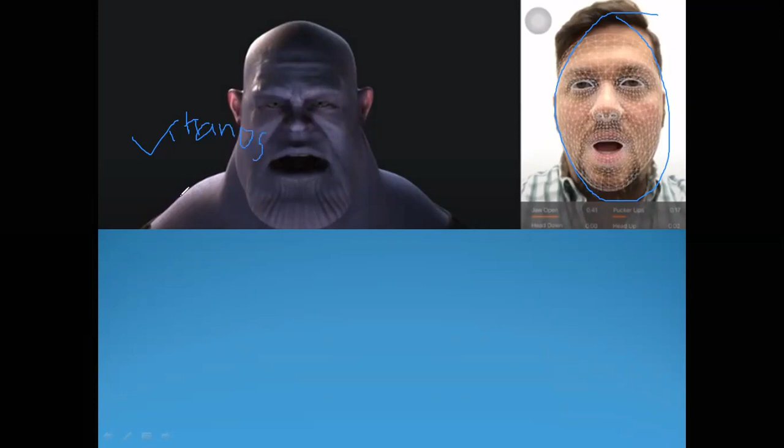I hope most of you have seen the movie Avengers, starting from, I think, the last two parts, where Thanos was there. In this image, you can observe the person has some mesh on his face, and on the left side there is a canvas. As this person moves, the movement of this person controls the movement of the canvas. You can see on his face some right-angled triangles are made.

I will denote it with the help of this. One right-angled triangle is here, another right-angled triangle is there. That is, squares are divided into two parts and that becomes a right-angled triangle. So that is nothing but, in our simple language, called animation.

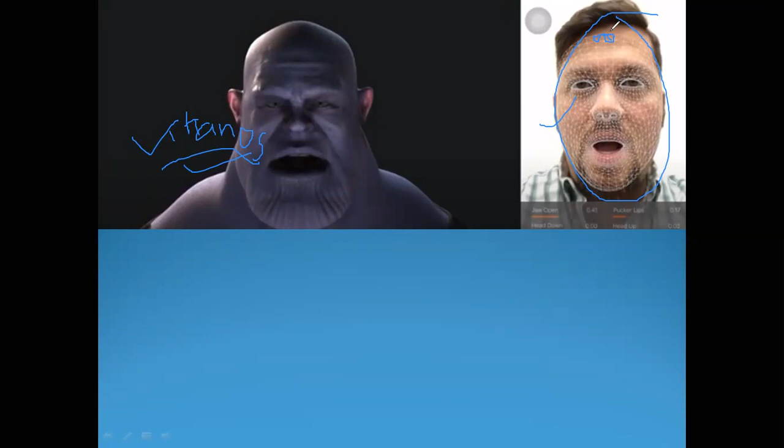Now the second example I am going to tell you. I will clear all the drawings. Now, the second example. So this is a face.

Some of you might be drawing sketches by using some grid. If you want, you can go for videos, YouTube videos like that. There are some faces which we have to make a grid and follow. Suppose I will tell with the help of the annotation, that is, suppose if this grid is there, this particular grid contains the left side of the eye, some white portion, some black portion, and some brownish portion.

If I consider the color image, so that image is there. Then the hair side contains some white portion due to light effect, and some portion is black, which is shaded and mixed with light, so some portion becomes gray. According to the color combination, we have to choose the proper shade while drawing any kind of sketch.

But before that, we have to divide this whole sketch into a number of small elements. This element is a square, and we are dividing the given space into a number of small elements, and that division is nothing but, in our term, we can call it an FE. This is done with the help of drawing, but we have to take positive things from that.

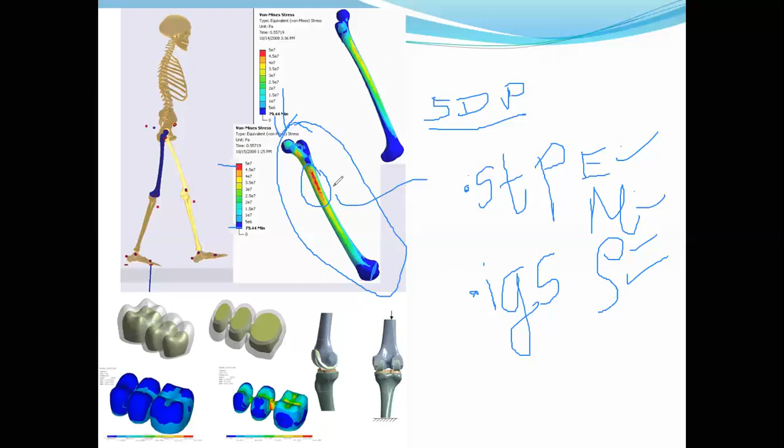So for that purpose, we need to first check it with FEA, then go for manufacturing, and then we can go for implementing it. Now I will just clear these things.

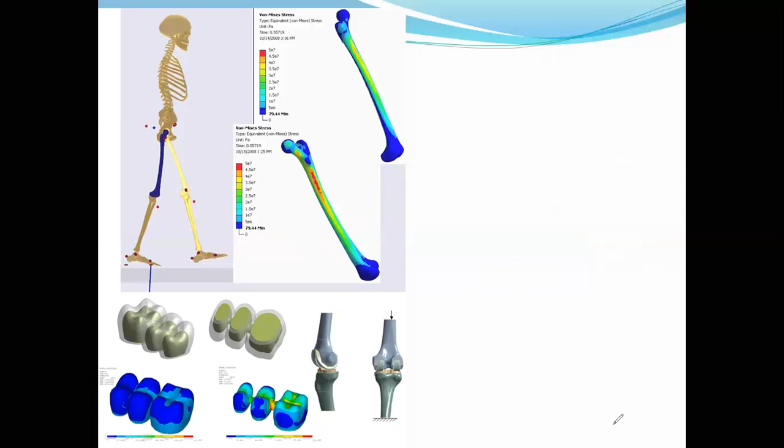Now the dental analysis is also shown. I will talk about it later since some images are coming up. But dental analysis is also the same thing. We need to define the force, we need to define some fixed support. We can define it, and we are going to see this in detail. So I'll clear these things first, then move to the next part.

That is the human brain. See here, some elements are there, some yellow colored and some blue colored elements. But all are triangular, you can observe here. All elements are triangular in nature. Every element, I will show here, all elements are triangular like this.

This is the structure of elements which are interconnected to each other, and all elements are triangular, you can see. So these elements are connected to each other, but they look triangular. But our brain is not a 2D image, a 2D thing. Brain is a 3D thing, so for the third dimension we have to consider the Z direction also. Suppose this is our X direction and this is our Y direction, then Z direction should be there. So for that purpose, the element used is tetra element.

Element used for this kind of brain is tetra element, because we can't use a simple triangular element which works only for surface things. But if we have to go for a solid, then we have to go for tetra. I will tell you later in the next lecture how to choose the element. For example, I have shown this, the use of FEA in the medical field. So I will clear this.

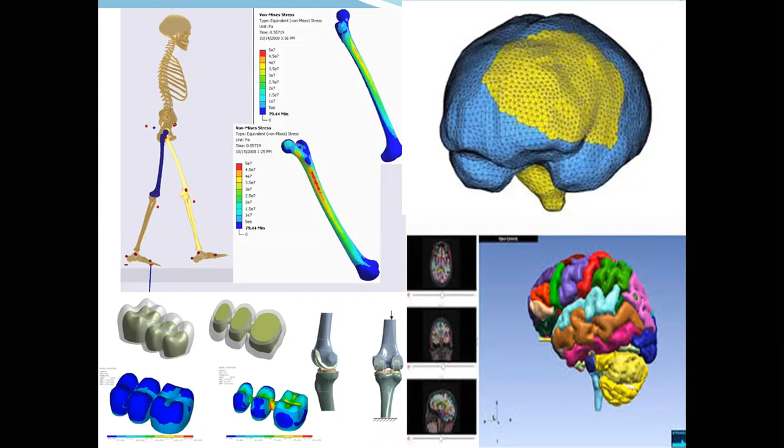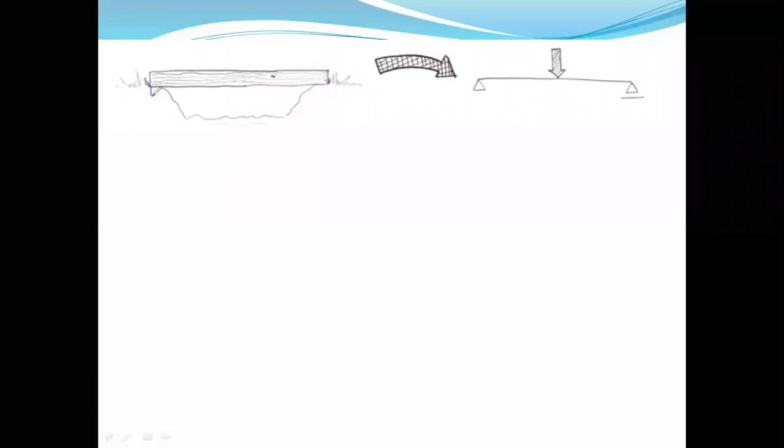See, one bridge is there and it is simply supported. For that purpose, we have to consider this part, and particularly this part, for the loading constraint. As of now, I will tell you this is the simply supported view. As per this, we can convert this into this.

Converting the given structure into a number of elements, see here, the element considered is only in one direction, the x direction. Previously you might have observed the element for the face, drawing the face. I told you that was a 2D drawing, but in the second slide I told you the element for the brain is 3D.

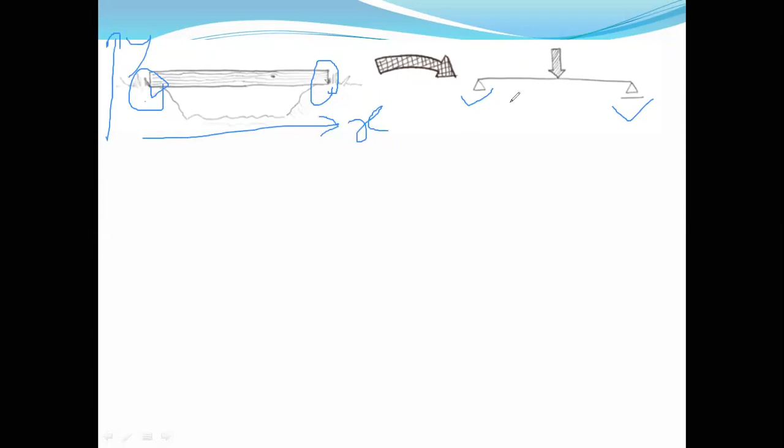But this is not. Are you observing the y direction anywhere for this beam? Only consider this beam, not suppose. No, this is only 1D. So we have converted the given object, that is this bridge, into the 1D element.

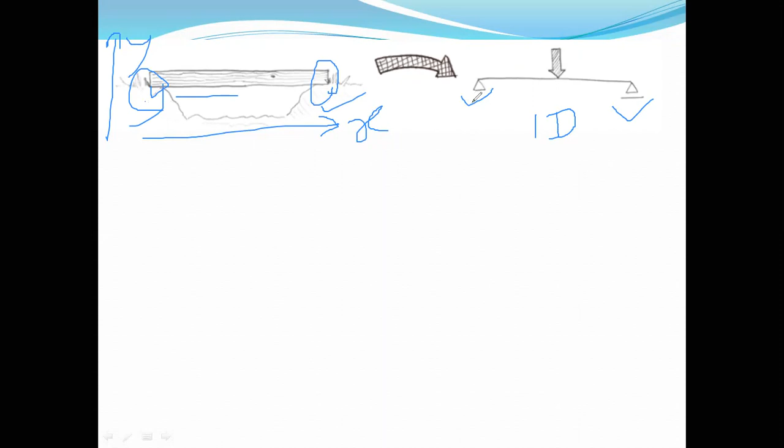And we have converted these two supports to simply supported, so we can call this a simply supported beam. And if a person is moving on that bridge, then we can consider it as a point load which can be applied at the center or anywhere. That's how we can convert our given object into the finite element. This is nothing but, yes, a finite element model.

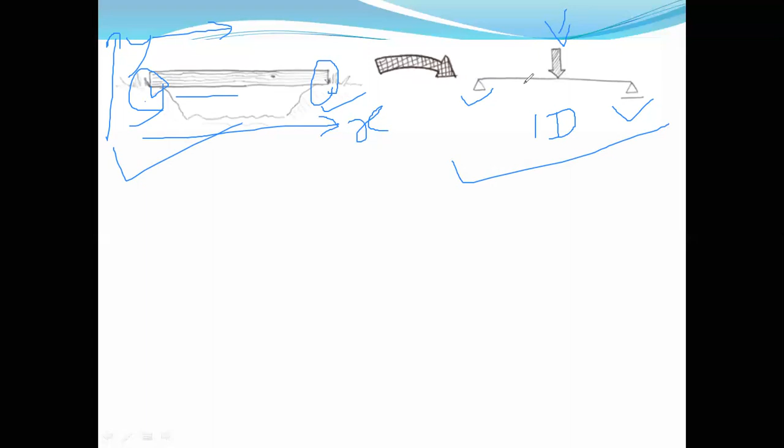So we can divide this 1D beam into a number of small parts also. That will be element number 1, element number 2, element number 3, element number 4, 5, 6, and so on. But the element endpoints are called nodes, as I have discussed in the last lecture.

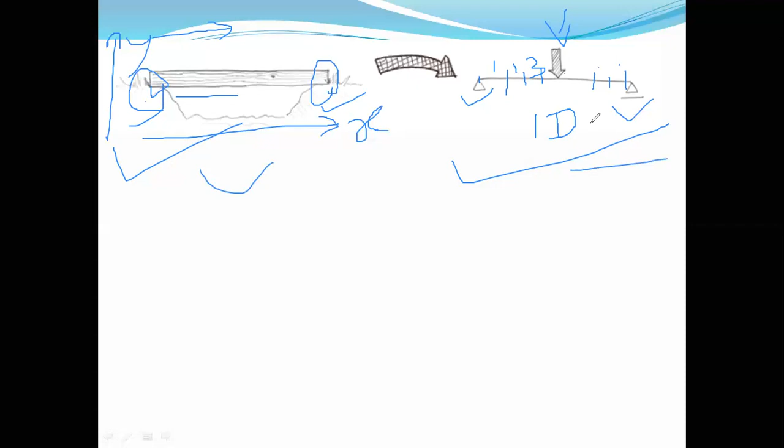According to our structural method, where we are joining the parts, that is beams, they are having some kind of failure, because they are weaker than the complete material. If a rod is there, then the rod cannot fail in between. But if a rod is connected to another rod, then the joint may fail.

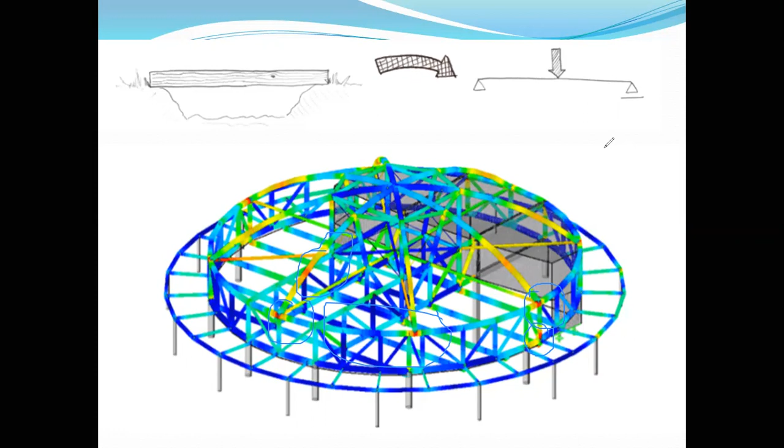So next slide, in this another structure is shown. The structure is having the first structure, so this is the red patch. You can observe here, this is the red patch.

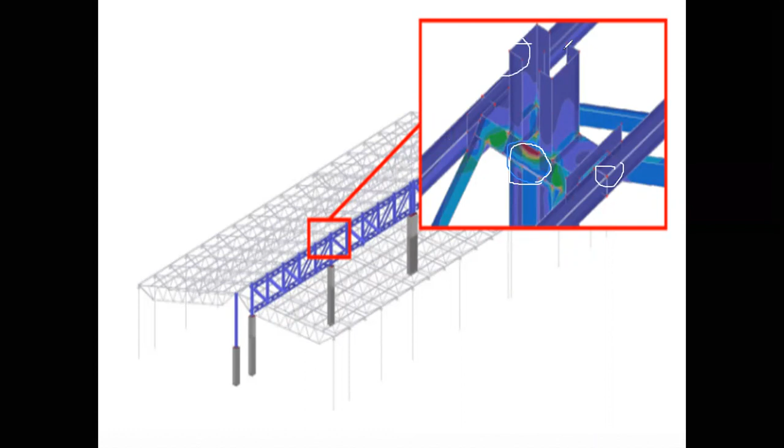These are some small points called nodes, and these are some elements you can consider. But this is a very complicated structure, you can observe this. So for that purpose we need a number of hours to see, and we can model it and analyze it after application of FEA. So it takes some time and experience also. Remember, we can analyze the things which we have to manufacture.

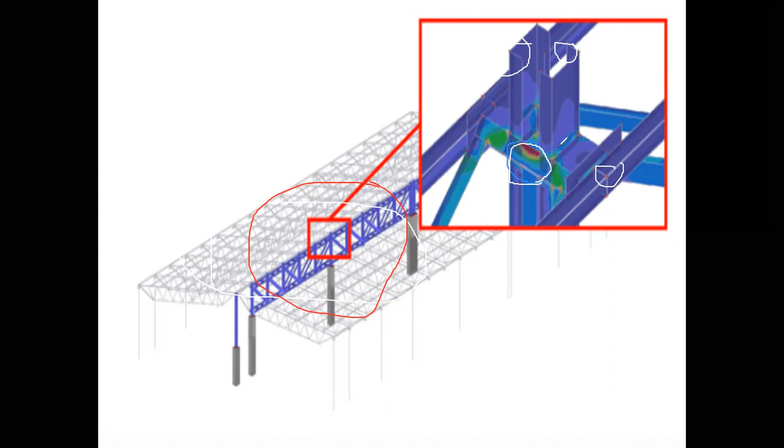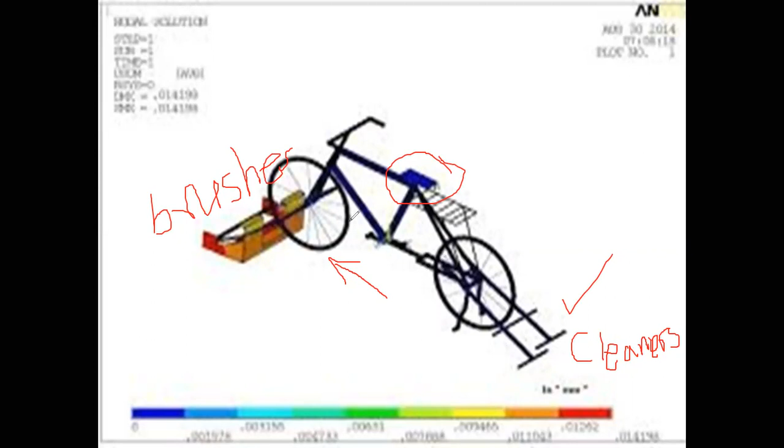But this model should also be analyzed, because in analysis we should get how much pressure or force is going to apply for these brushes or these things, how much force this bicycle here and here can bear, meaning force in terms of load. Load of these attachments should be borne by the cycle. Then the normal user can handle the pedal and it should be user friendly. So for that purpose we have to analyze all the things in a very specified manner, and different analyses are available. You can check on the net by putting a name like bicycle pedal cleaning setup, and you can get different ideas for that.

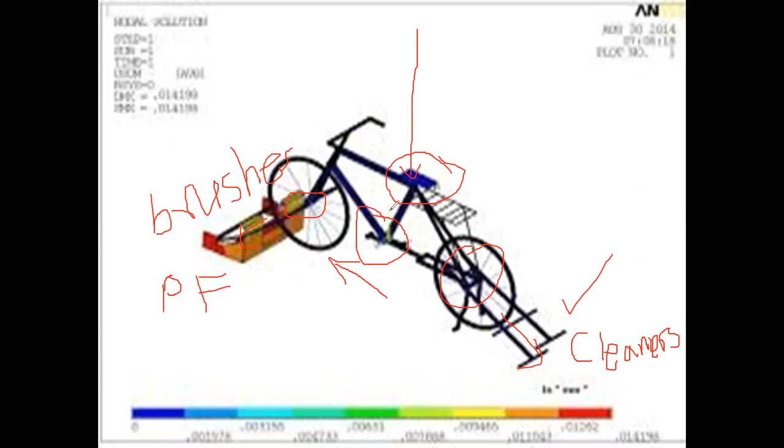Now next one, see, this is the static structural analysis. This is the Baja model, that is SAE Baja model, which I have downloaded. Here we have made a 1D structure. This is the rod we have considered, this is also the rod we have considered, but we have applied the cross-sectional area which is uniform in nature.

But here we can see the portion is actually the red portion, which is having maximum stress or maximum deformation. So we have to think about deformation also.

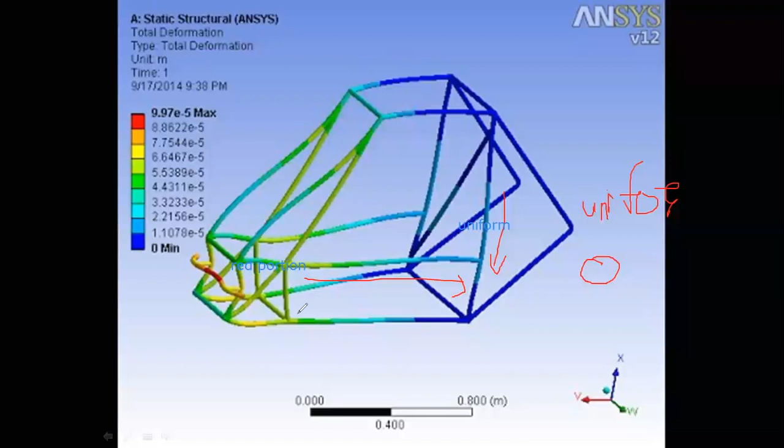So I will tell you here. Then this blue color you can observe here, here, here, not here, here, here. That blue color is having deformation of 1.107 into 10 raised to minus 5.

Then next one, the sand color, here we can observe the color nearby that exact blue color. Then it is moving towards green shades, which we can observe here, green and yellow shades. Then orange shades, which will be nearer to red shades. This orange shade means the deformation lies between 7.754 into 10 to minus 5, to 8.8622 into 10 to minus 5. Then above 8.86 to 9.97, which is maximum, lies here. So that is the satisfactory analysis we are going to observe in this semester.

Then there is another concept here, that is x-axis, y-axis, and z-axis, which we have to consider. There is a local and global coordinate system which we have to learn during the theory sessions, and you will have a lot of knowledge of theory, and after that you can apply the theory into practical. So we are going to see it stepwise, but just for conceptual purposes you can see this figure, that is the contour, and you can observe the stress.

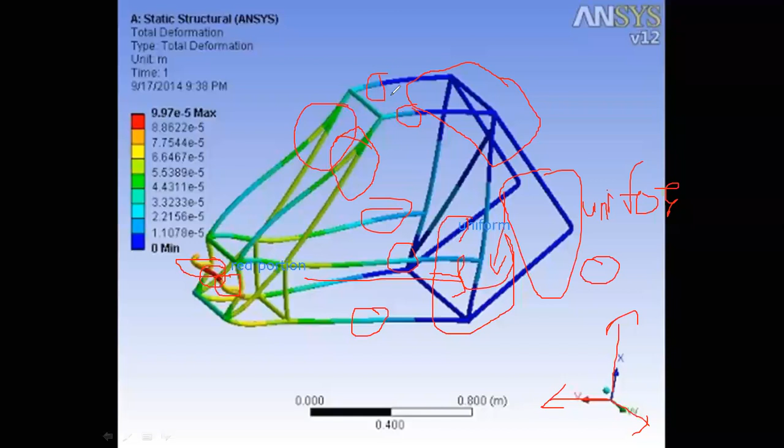See, this lecture, this webinar, is taken because I wanted to tell you what FEA can do. So after that we can start the actual syllabus. Okay, now next one.

This is the actual car. As I told in the previous slide, there is only structural analysis here. The fixed constraints are given and force is applied, then we look at what is the actual behavior.

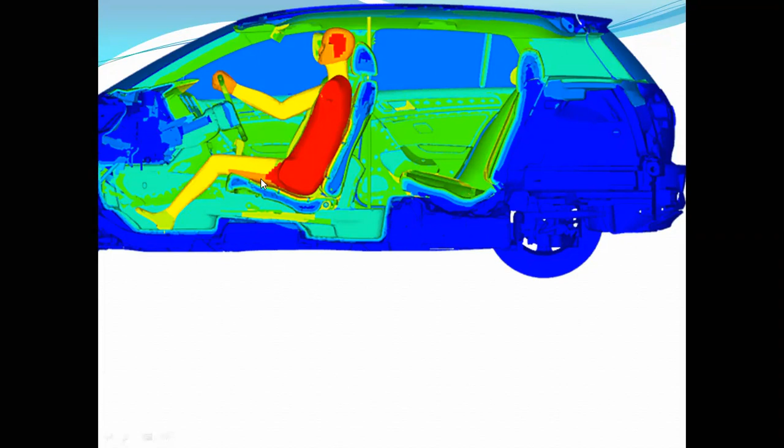But when we go for any kind of thermal analysis, we have to consider the atmospheric and weather condition. Human body temperature is 37 degrees Celsius as we consider, so that is shown in the red portion here.

You can observe this portion has the maximum temperature, but we know some temperature should be followed by the body. Our hands have less temperature than the actual body, and other parts of the body have even less temperature.

But the actual inner part is not shown, where the temperature will be higher than our human body, so that part is not shown. It is only a cut section of the car where the user is sitting, and this car model is made only to check whether the person can sustain the car temperature or not.

So the thermal conditions were given as an input, and the output comes as a temperature distribution. This is the temperature distribution diagram. In the next figure, you can observe this.

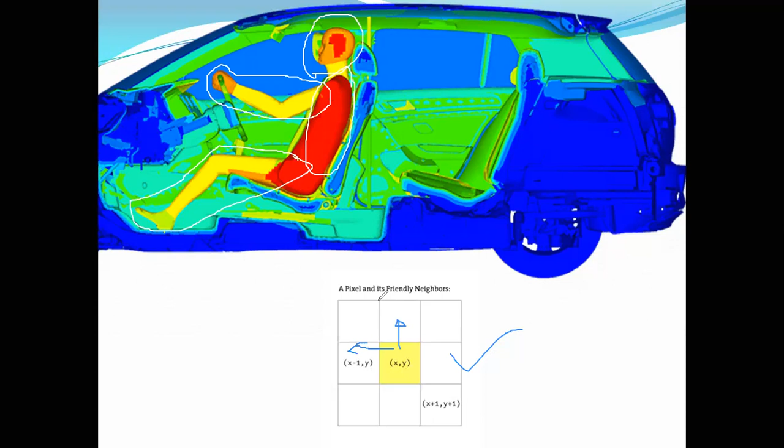This figure has x and y. If x and y is counted as 0, then going horizontally backward it will be x minus 1, y. Going the other way, it will be x. Here x and y, but accordingly x and y will be there, with x in the same direction, so it will be y minus 1.

Now for this part, here it is x plus 1 and y, and here x and y plus 1, and here x plus 1 and y plus 1. Likewise, we can go for pixel measuring in FEA. That is the concept of pixel in FEA.

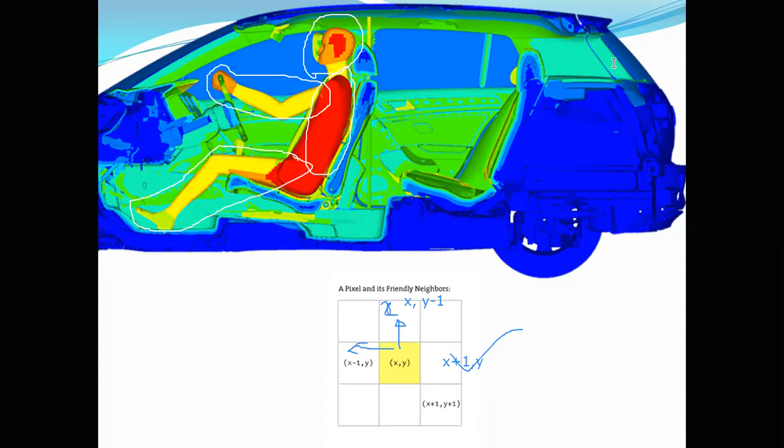Now we move to the next slide. This is also a temperature drawing. See here, a pixel structure is there, you can observe it. This is also called a pixel.

Such a pixel will have an element size. You can observe this element size is different here, and the shape is also different, so this element size and this element size are not the same. That creates some kind of error in the machine. So we can mesh in such a way that we divide the given structure so that this element size and that one are quite similar.

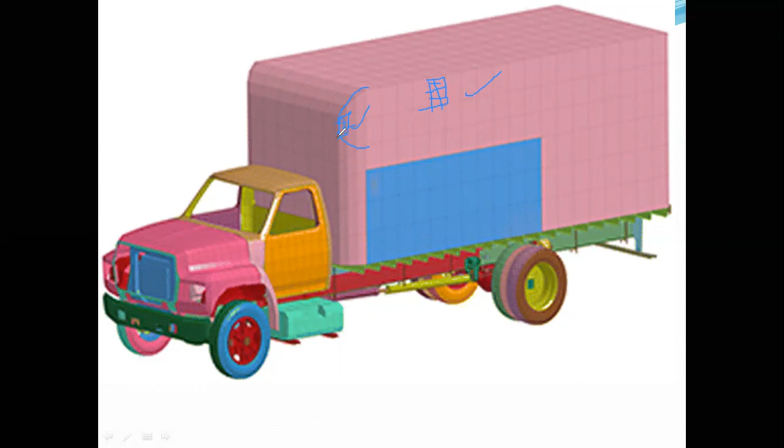We have to divide this structure again into small elements and mesh it again and again, doing a fine mesh, so the element size should be very small and closer to these values. At the end we will get good quality mesh and more accurate results than this model has.

Next slide, we'll go for it. Now this is the scissor, hydraulic scissor structure. Actually this was the model supposed to be manufactured by me. This was my dream project, and with electricity I was making it.

But this was my first trial and error, that is, if we can move it up to the fifth floor by telescopic arrangement, but that is not possible because it requires a lot of space. Still, it is analyzed by using the FEA software.

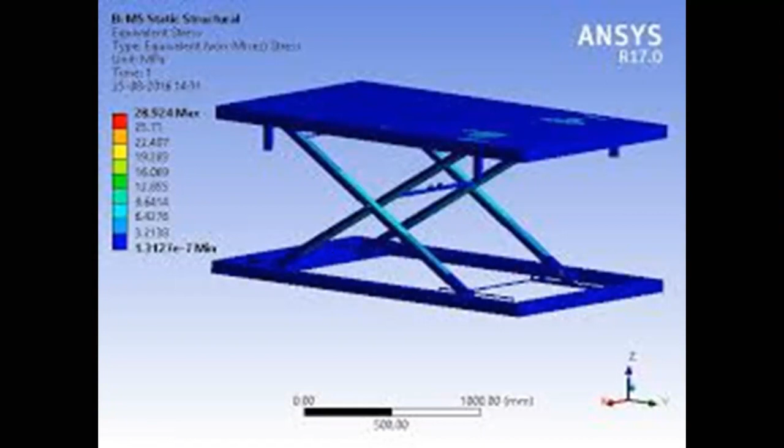This model has blue everywhere. Blue means the model is more than safe according to our material application and according to our boundary condition application. On the next slide, we are going to move on.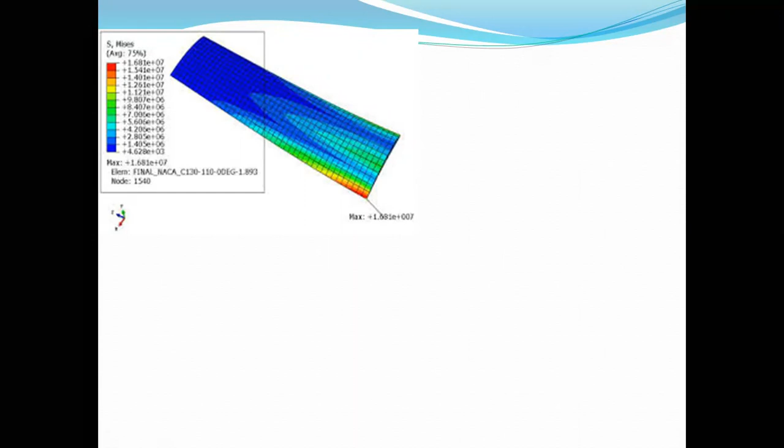Now we are moving towards real life approaches, some daily life examples. We have a fan in our room, so this is the blade of a fan. Here we can observe in both figures, the blade fails.

Here the blade fails means when the concept comes to join, the failure will happen. So we have to take care that our joint should be strong and the material used for joining should be good quality, and we should go for some better modifications also. If there will be fans which are not having any kind of joint, that is the whole structure is an assembled structure, then that will be the best quality fan. The blades will not move here and there, and blades will be completely stuck to the original model, main part of the assembly. So we can model it, but that is not feasible, and we are not facing that because there are some other conditions.

So we are facing the fan having some blades. So this is another structure. This is not actually a fan, but for concept reasons I have used this image. I didn't get the image which is under analysis.

Then there is another analysis which we can do, that is analysis of a room. If a fan is in the room and that room has an area of 1 kilometer by 1 kilometer, is it possible for every person sitting in that room to get air from the fan? No. So we have to analyze how many fans are needed in that 1 kilometer room, and we have to analyze in a simple way, that is the flow analysis of air.

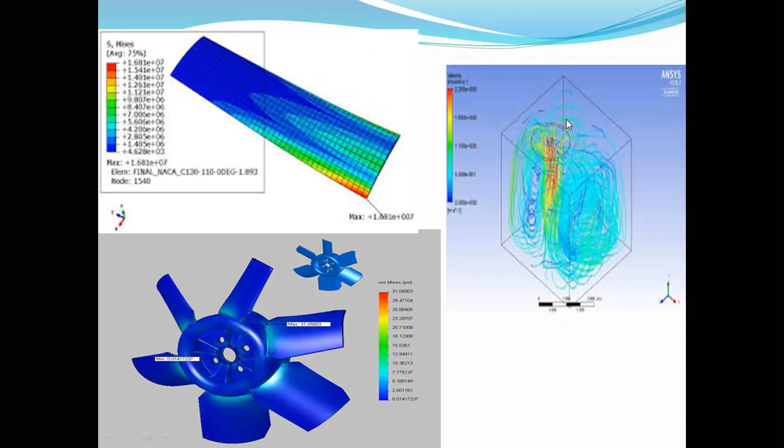So next one, this is another analysis. This is the structure, but I will consider it as a bed. So if the bed is there or table is there, which is around us right now, and if a person is sitting on that bed, then where the bed will fail or where the table will fail, where the structure will fail. The maximum failure count shown is in the red region, and the bed will not fail in the blue region.

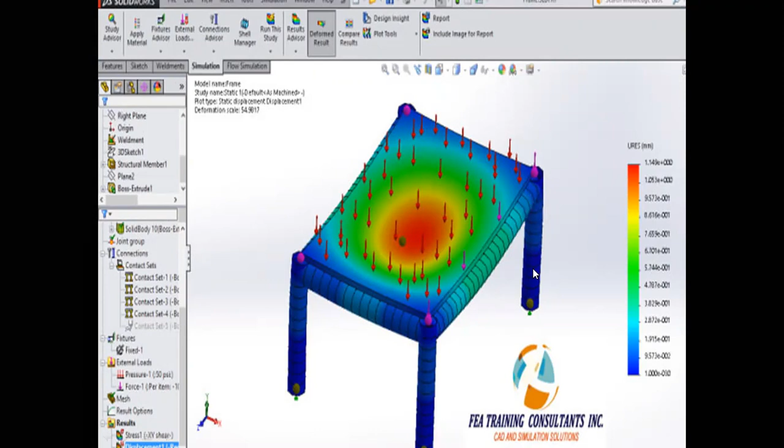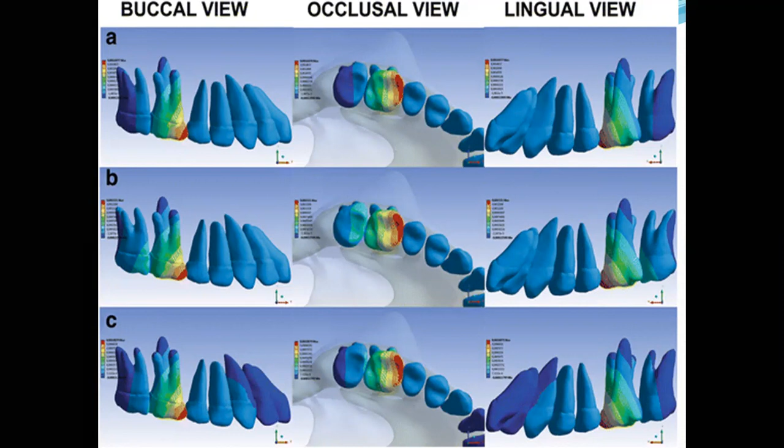Now next one, these are nothing but our teeth. So these teeth are analyzed with the help of FEA, and there are some buccal views, occlusal view, and lingual view, and we can observe some teeth here. So if anybody wanted to do analysis for any human body, and wants to go for a good quality project by considering the medical field or any medical field, then they can go for such a kind of analysis also. Yes, FEA can be applied to this field also.

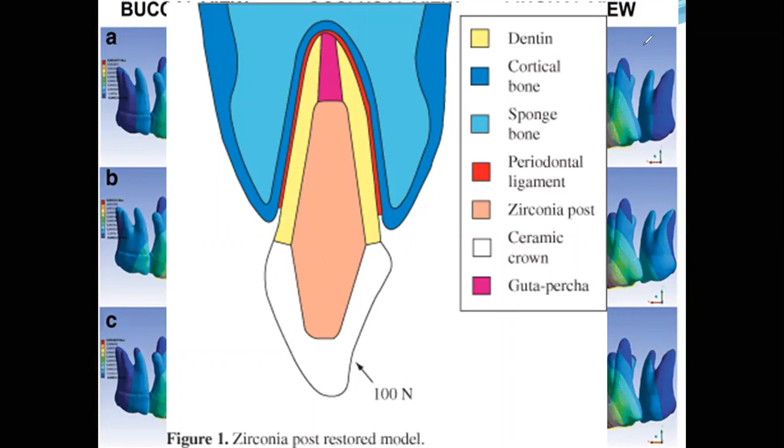Here the model - why I'm saying repeatedly where the model fails, because some people may not understand where the model is actually failing. They are looking only for figures, but as per standard sign convention, red is the part which is considered as failure, and blue is the part which is considered very safe.